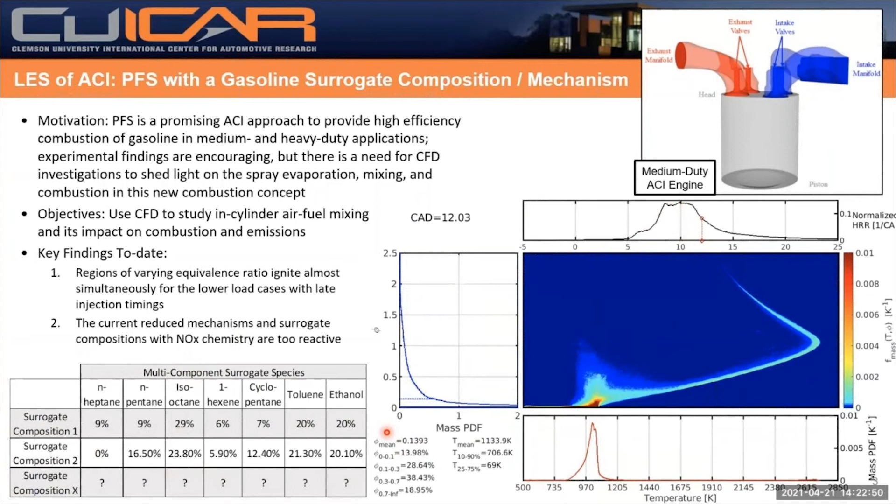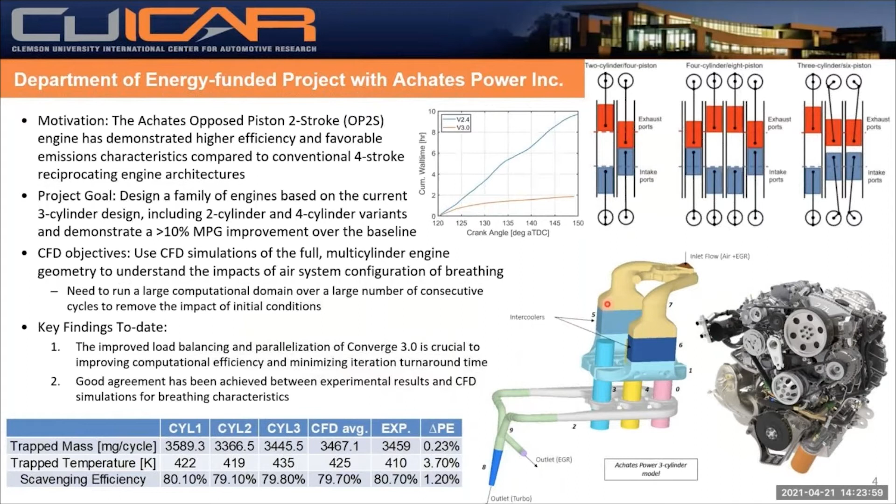Converge does have conjugate heat transfer, and conjugate heat transfer works great for a lot of applications. We have used it in the past. But we found that this iterative method is maybe better suited for thin thermal barrier coatings so that we can get better control over the grid within FEA and within CFD. And we can learn through that iterative process what are the impacts on FEA and CFD from the grid.

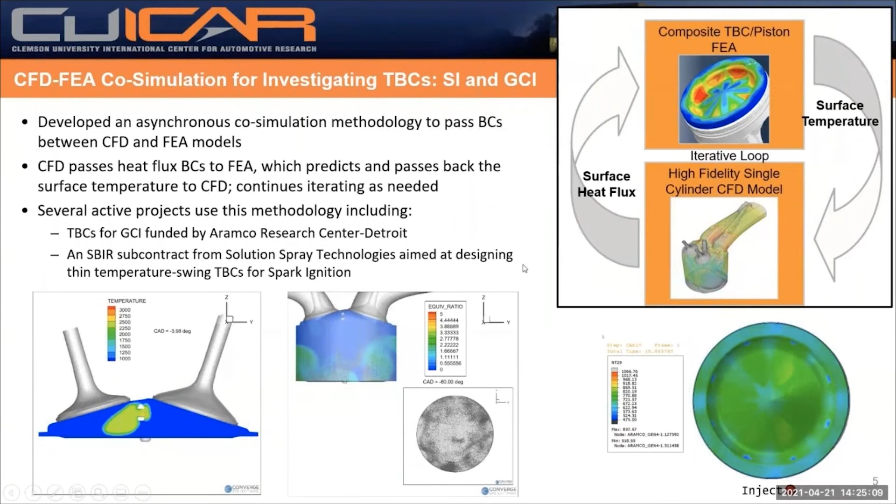So what we're showing down here is just an example result from that FEA simulation where we solve for the surface temperature on a piston due to combustion. And so finally, on this last slide, we have our new Army Center, Virtual Prototyping for Ground Systems, VIPR-GS.

This is being currently stood up, and it's funded by the Department of Defense, involving more than 60 faculty members at Clemson. There are three main focus areas: one is related to autonomy, and one is related to virtual prototyping.

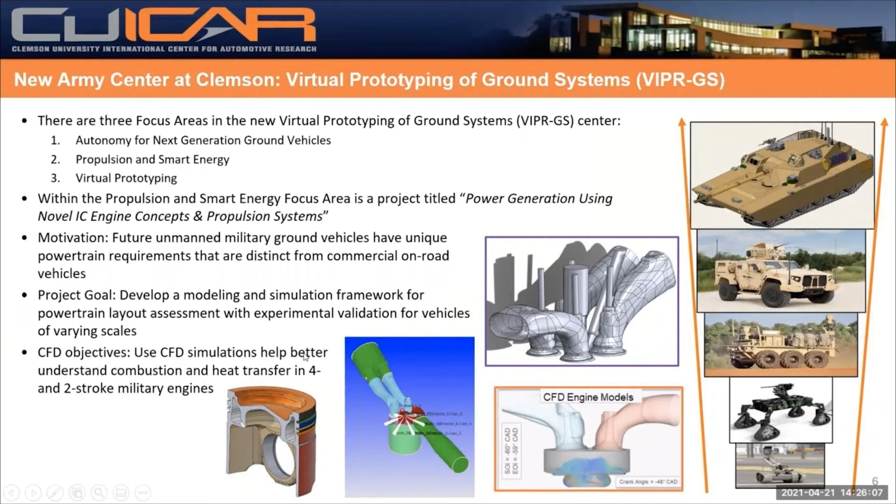With that, I'll thank you for your attention. I would like to acknowledge the funding for these projects, and I would also like to acknowledge our collaborators at Sandia National Labs, Dr. John Dec and Dr. Dario Lopez-Pintor. Finally, special thanks to the PhD students who provided most of the content, specifically Patrick O'Donnell, but also Sean, Ari, and Rahul. If you have any questions or would like to discuss more about any of these projects, please feel free to contact me at this email address. Thank you so much for your time and attention.

Next, we'll hear from Dr. Alejandro Roldan Alzate, who is a professor at the University of Wisconsin-Madison. Dr. Roldan Alzate received a PhD in mechanical engineering from the University of Wisconsin-Madison in 2008, then joined the Vascular Tissue Biomechanics Laboratory at the same institution as a research associate. In 2010, he joined the Department of Radiology at the University of Wisconsin-Madison as a cardiovascular modeling scientist, and in 2015, he obtained a joint faculty appointment in the Department of Mechanical Engineering and the Department of Radiology. His research focuses on fluid dynamics analysis of physiological and pathological flows using a combination of medical imaging, additive manufacturing, particle image velocimetry, and computational fluid dynamics.

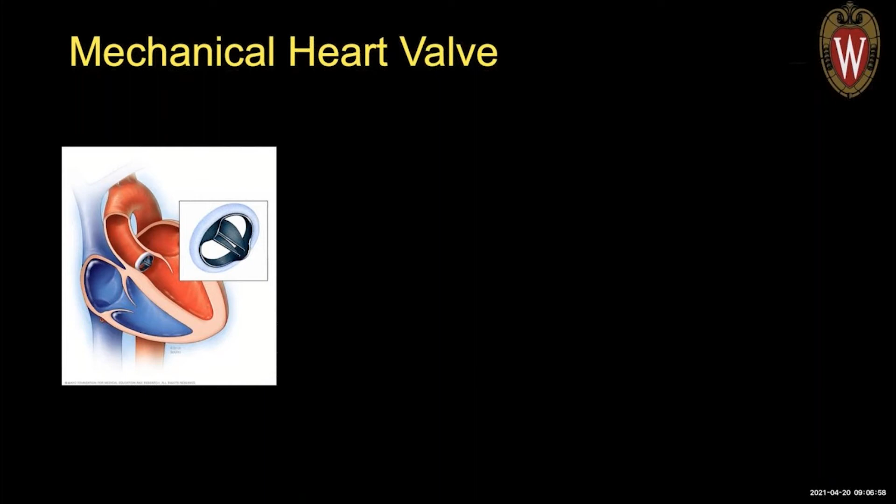We started by trying to understand how we could get Converge software to help us in the process of understanding physiological flows. One of the main applications for computational fluid dynamics in the market is mechanical heart valves. For that reason, we started with a simplified version of it, and we found how the adaptive mesh refinement methods developed by Converge are really well suited for what we want here, which is moving boundaries and complex flows.

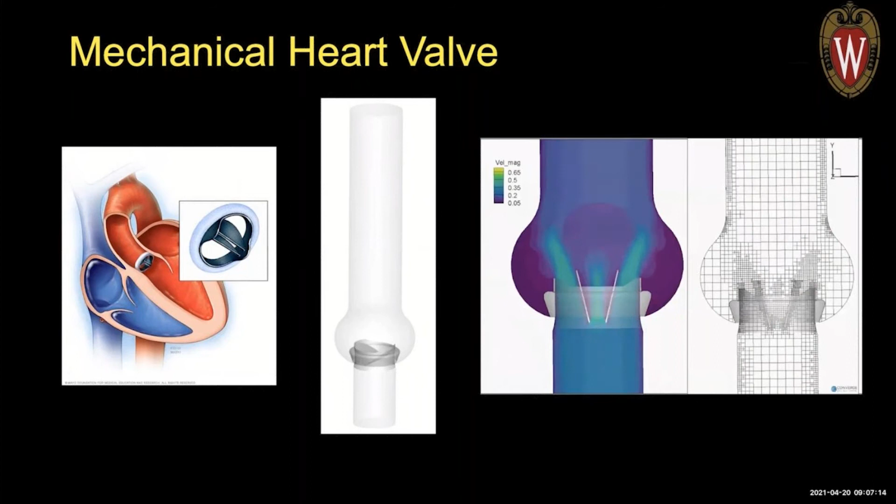One of the things we did was start analyzing how we could test the comparison of Converge software with other softwares, and we started trying to play with the settings of the adaptive mesh refinement. This was just a preliminary study. However, we found that if we wanted to keep going with this, we needed to standardize the way in which we simulate our problems.

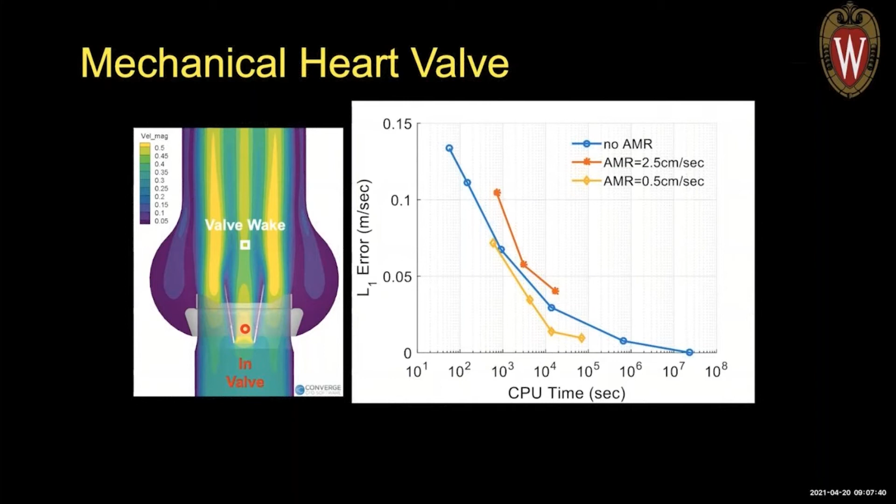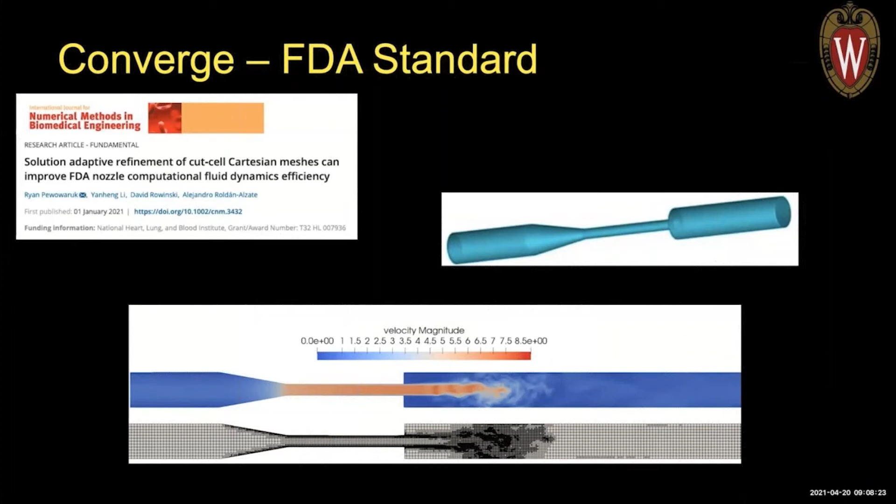This gave us some thoughts about, now that we have validated and standardized the way in which we do this, we can go into more patient-specific analysis. For that reason, we started looking at aortic coarctation, a disease that kids are born with, in which the aorta, a blood vessel coming out of the heart, is narrower than normal and imposes complex flows. MRI, for some reason, misses some of this information, so if we can use computational fluid dynamics to understand the flow in the aneurysm and other regions, then we are enhancing what MRI can provide us with for clinical purposes.

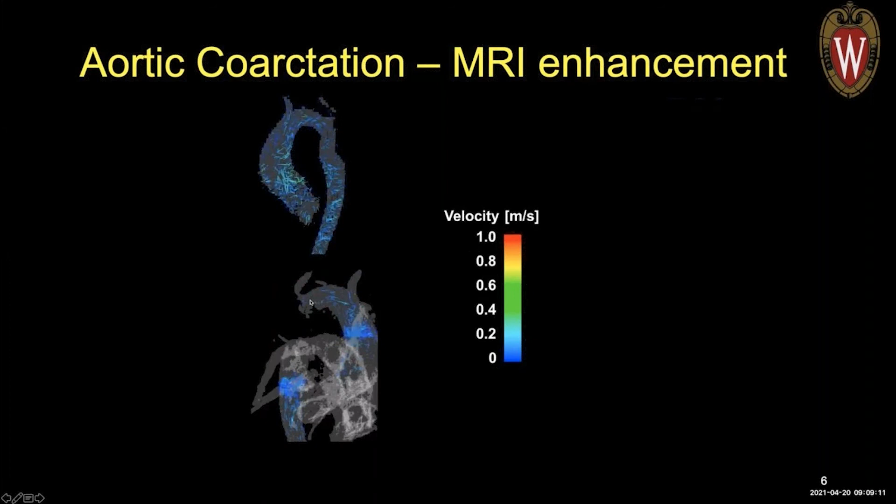The same thing happens in cases where there is a stent, for example. In this case, there is a stent in a region where you don't see signal in the MRI data. What we do is generate the geometry and get the data that was missing from the stent. To give a brief background, stents are made out of metal, and that metal imposes an artifact in the MRI signal that doesn't allow the velocity measurements to show up. So with computational fluid dynamics, we're able to fill the gaps between what is existing and what is not from MRI.

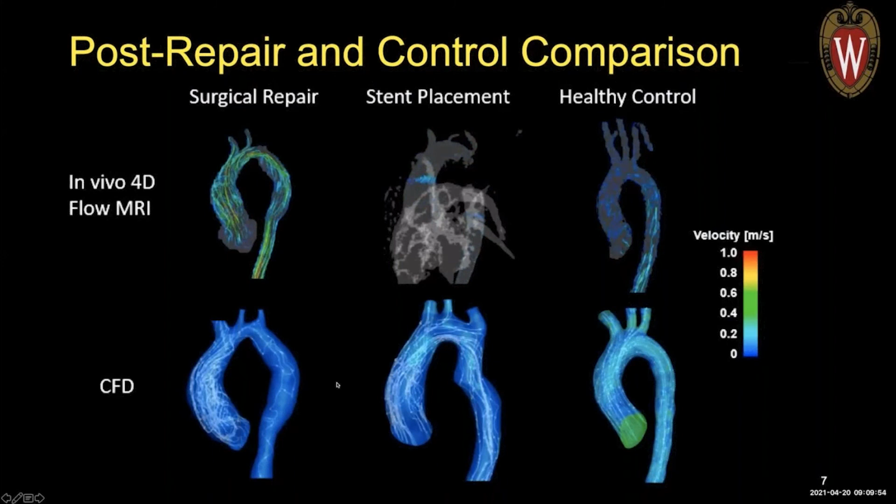Continuing with the same analysis, we tried to compare how 4D flow MRI, which is what we normally use clinically, can be enhanced with CFD, and then think about how in the future we could use this for clinical diagnosis and surgical planning. Connected to this, we started thinking how we can use computational modeling to clean and enhance the MRI data.

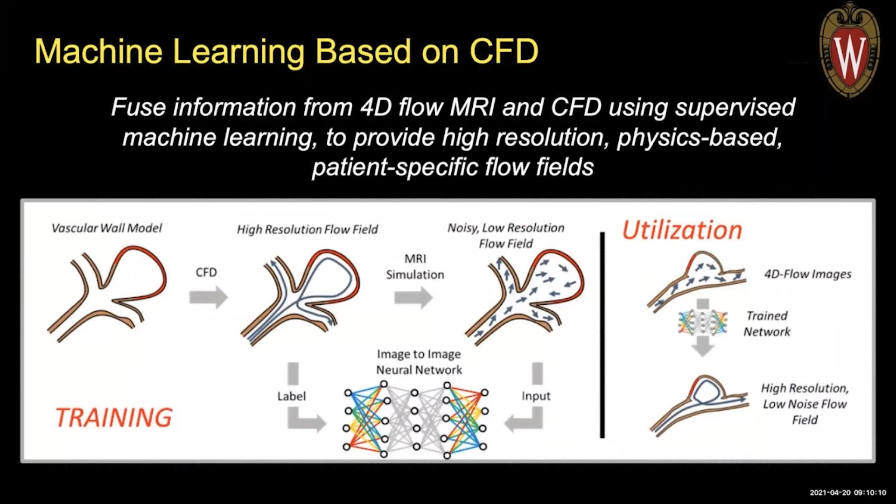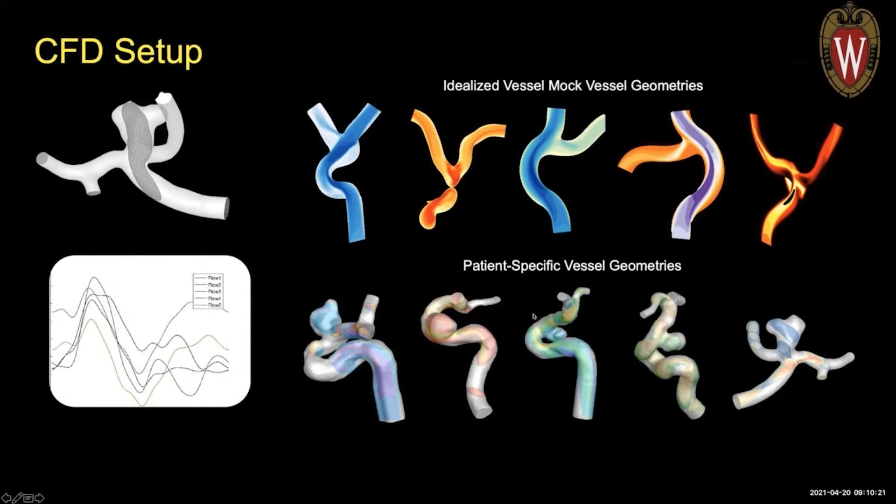For that reason, we mixed machine learning and computational fluid dynamics by generating a number of simulations with patient-specific flow curves and different anatomies of brain aneurysms to clean the MRI data. In that way, we convert the data to get something that is divergence-free, putting physics into the reconstruction of the MRI data, and not just getting crazy vectors that don't make sense, which is something that could happen with MRI.

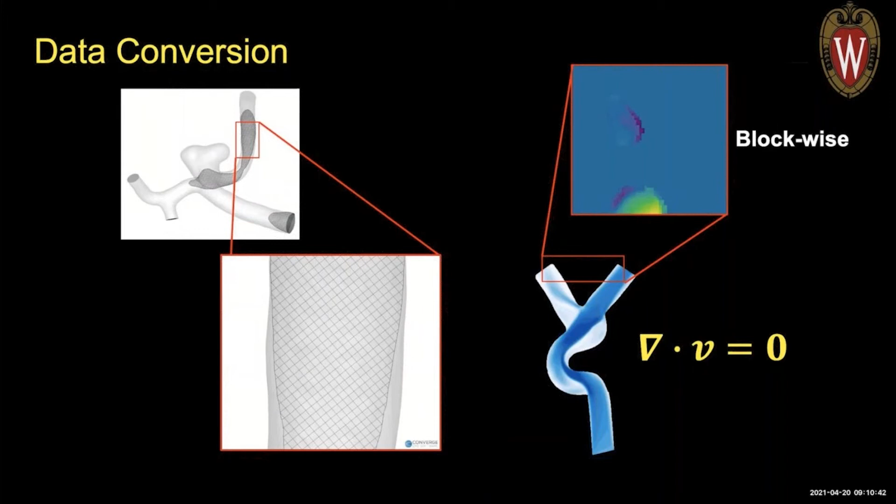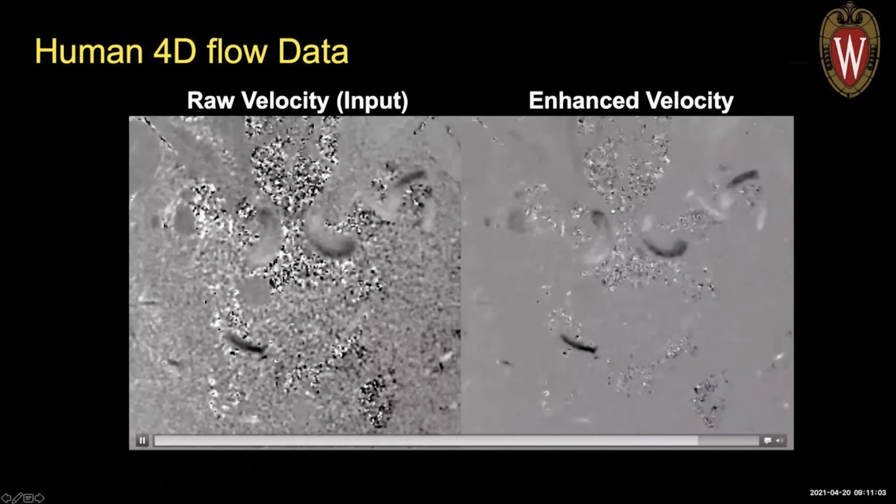So what we do is get a convolution neural network to train on the MRI data to make it look more physically realistic. As you can see here, the noise of the MRI data can be cleaned really well with the data from the trained network combined with the CFD simulations that we performed using the CONVERGE software.

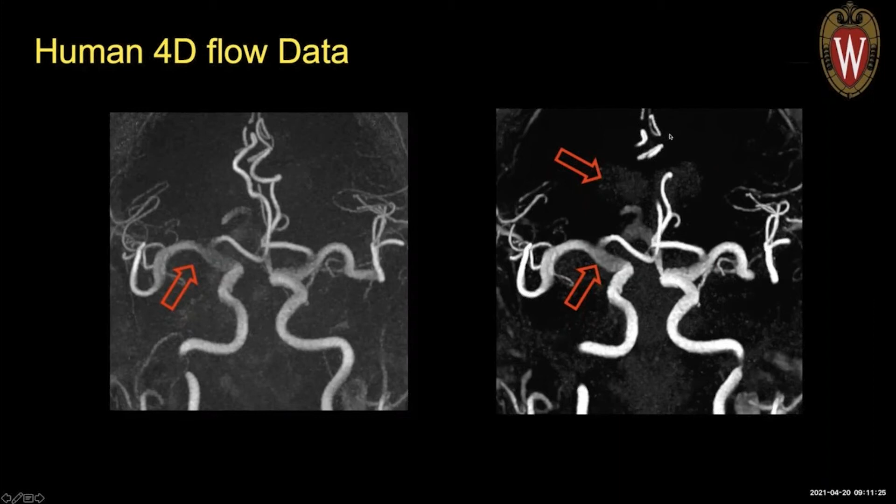This is an even clearer way of looking at it, because you see noise everywhere, meaning non-physical motion that the MRI is capturing, whereas the CFD allows us to clean it up and say those regions were not supposed to have flow, they were supposed to have zero velocities. This way, any derived parameter like wall shear stress, pressures, or velocities would be more realistic. For example, here is the normal 4D flow MRI data, and here is how it looks after cleaning with CFD. Velocities at the wall are more realistic, close to zero, allowing us to work with realistic physics.

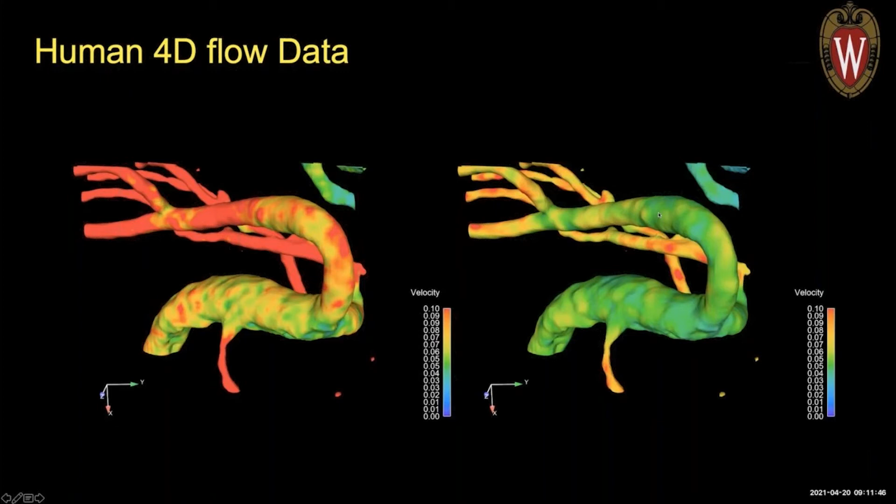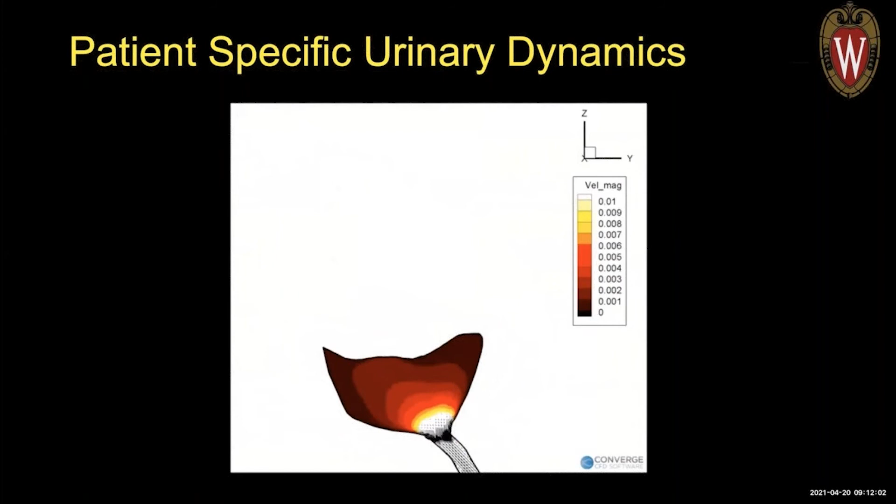Recently, we have implemented this method for urinary dynamics, used for patients with enlarged prostate or bladder problems. Since there's no non-invasive way of assessing this, we implemented realistic MRI data coupled with computational modeling, and we're able to analyze how vorticity in the bladder is affected by prostate enlargement and other problems.

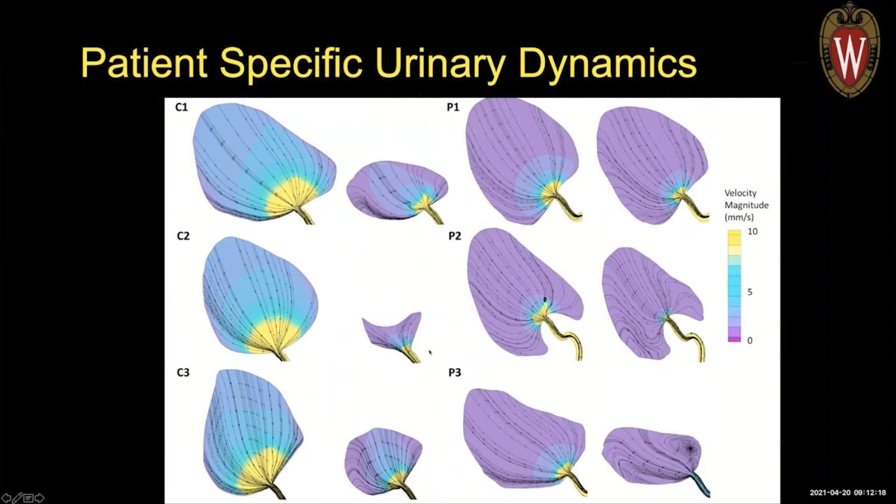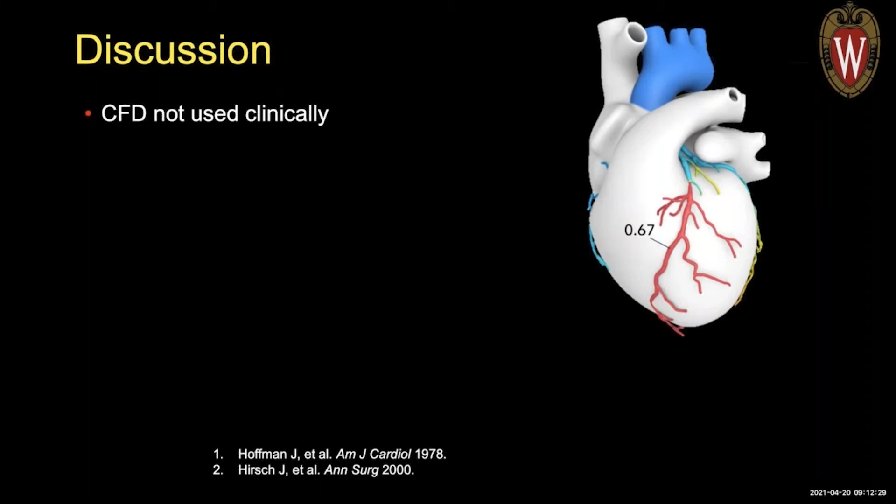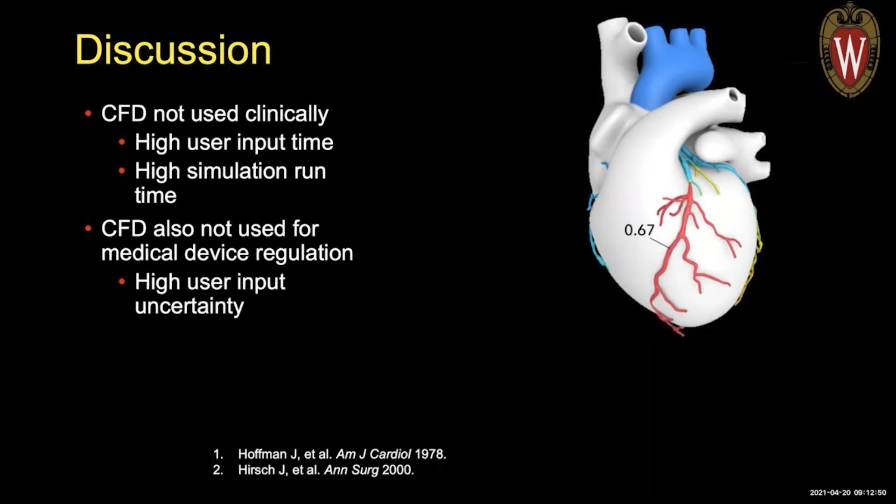With this, what we can say is computational fluid dynamics is not currently used clinically, except for a few companies that use medical imaging to detect coronary blood flow. It has high user input time and high simulation runtime. It is not used for medical device regulation under FDA standards, mainly because of uncertainty and other factors that could affect this.

But we think that solution adaptive refinement can minimize these factors and help us use computational fluid dynamics more actively in the clinic. With this, I'd like to thank you, and I'll welcome questions.

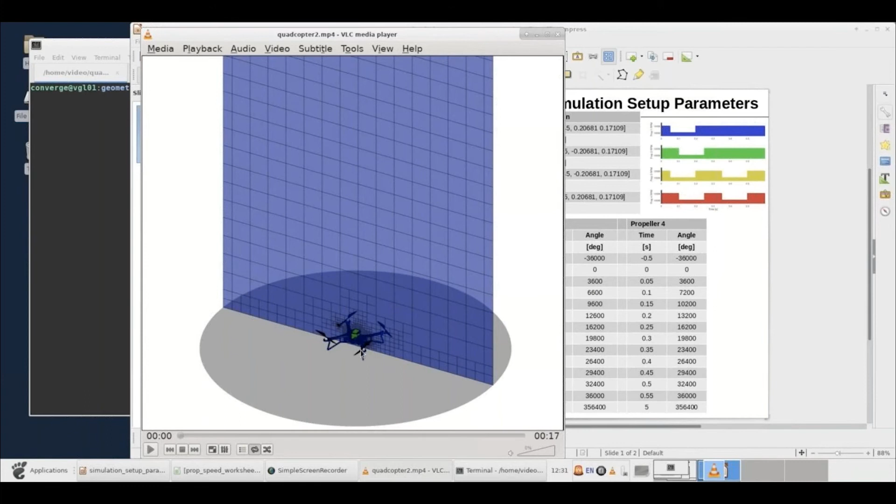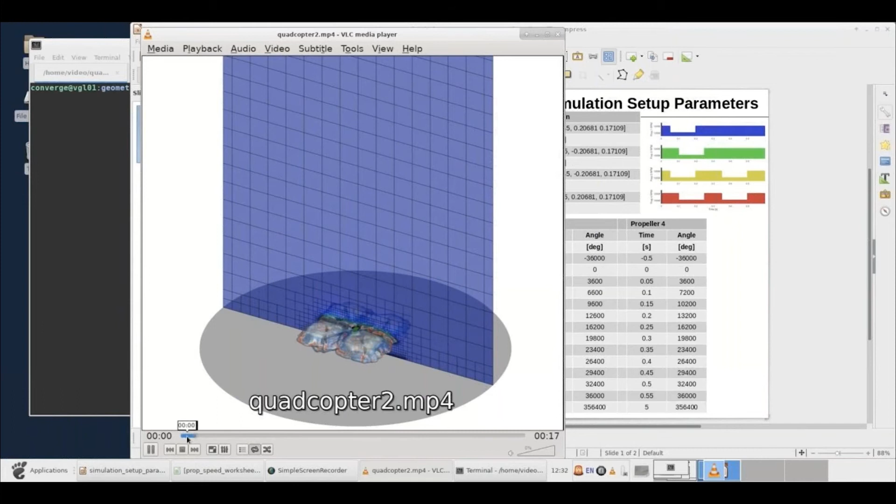We'll now be demonstrating Converge's ease of use by performing a complete case setup on an example case. The case we've chosen is a quadcopter fluid structure interaction problem, in which the speed of the 4 propellers is prescribed with profiles, and the motion of the copter is determined through fluid structure interaction. This case is selected to showcase how easy it is to include extremely complex motion and geometry of parts in a CFD simulation.

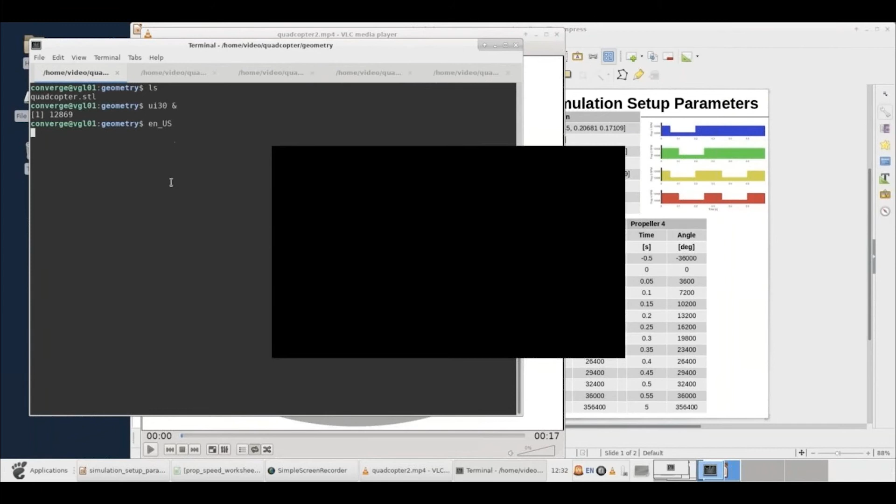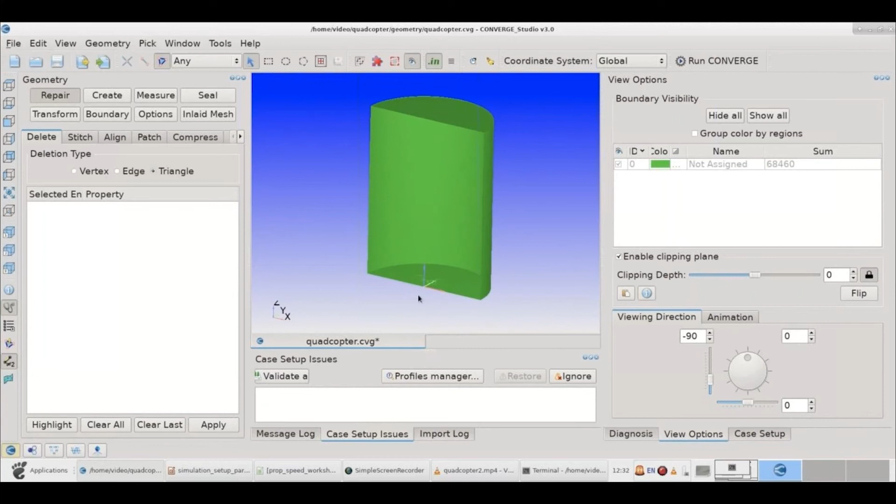We'll get started by launching Converge Studio and importing an STL formatted geometry. The STL file is read in, and we choose our STL format quadcopter geometry. Now we'll inspect the imported geometry. Let's draw a clip plane across the center so we can take a closer look, zoom in around the quadcopter, and see our outer domain. Then we'll change that clip plane so we can see the full drone.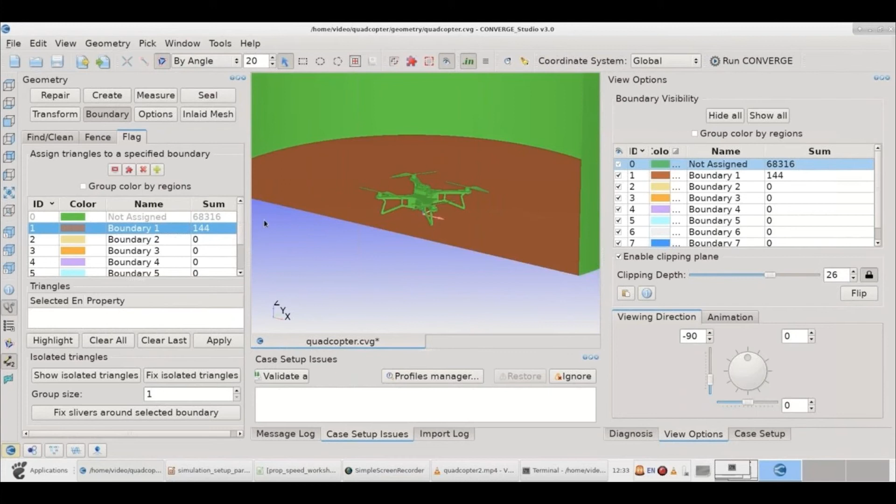After that, we'll begin the process of boundary flagging, where we group parts of our imported geometry into boundary conditions. We start by creating 7 boundaries, first flagging the ground and labeling it as the ground. Then we'll zoom out and select the far field boundary, renaming it as far field. We can hide those two boundaries now to focus on our quadcopter, being careful to keep the same orientation and numbering consistent with our case setup guide.

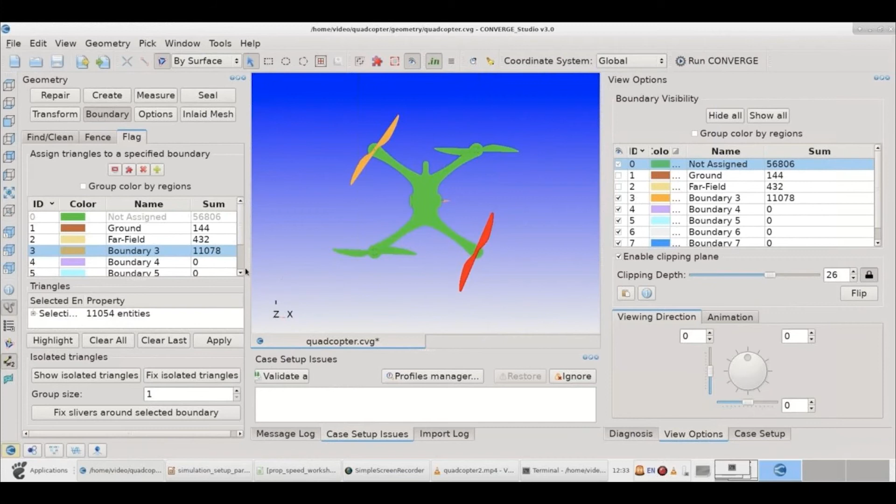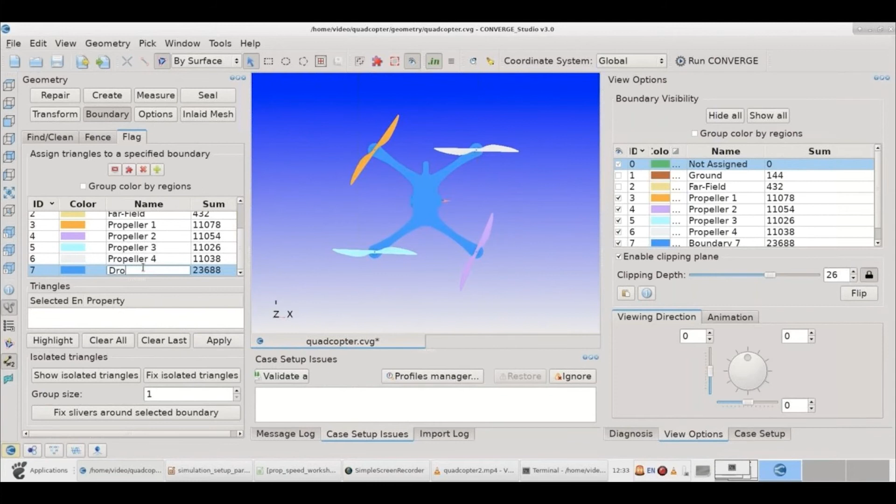Let's flag the 4 propellers by surface: propeller 1, 2, 3, and 4. Then give the boundaries the appropriate names. So we've got propeller 1, 2, 3, and 4, and our last boundary to select is our drone frame. We'll select that and give it an appropriate name. Now all our boundaries are assigned, and we can take a close look at our quadcopter with boundaries flagged.

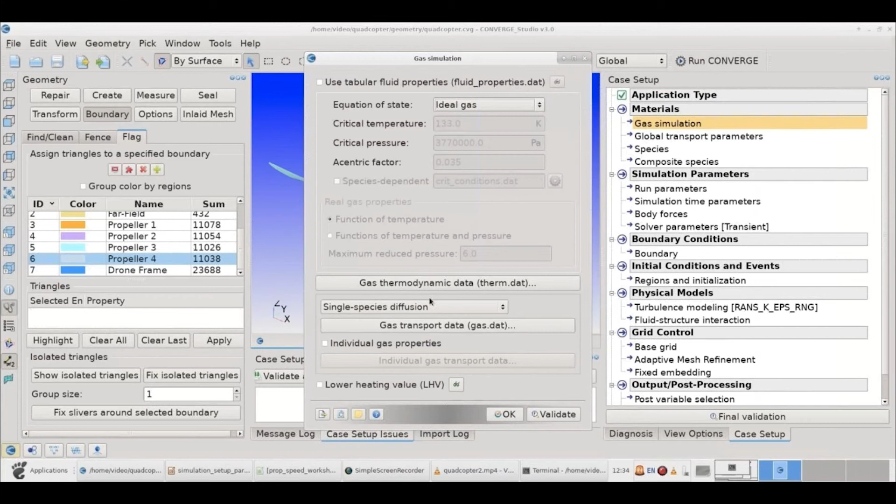Now we'll begin our case setup, and we'll choose our material type to be a gas phase. We'll add some body forces for gravity, and under our physical models, allow turbulence and fluid structure interaction, as well as adaptive mesh refinement and fixed embedding for our grid. Start with an ideal gas formulation for our gas properties and set our global transport properties to our defaults.

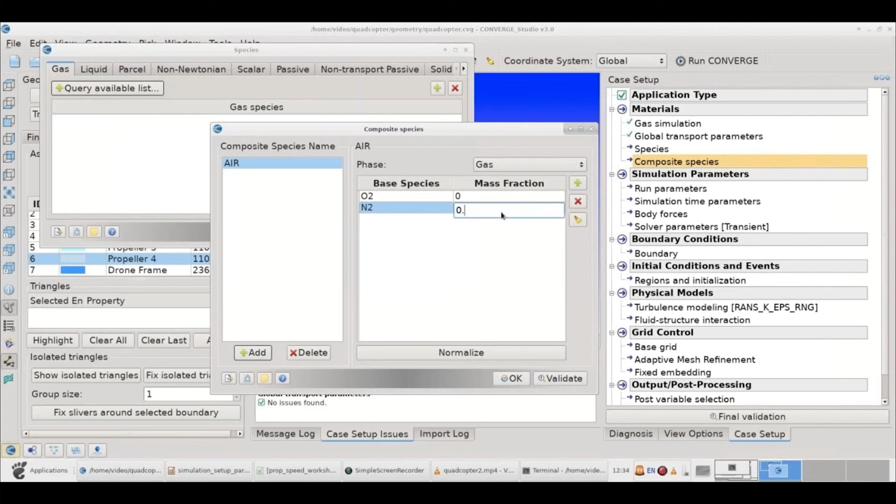Then we'll add under our species air, which is a mixture of gases. We'll create what we call a composite species, a mixture of fixed proportions of the species. So we'll add the oxygen, and then the nitrogen to our air, and set the mass fraction of each of those components. Now that we have this mixture defined, we can add it to our simulation under our available gases. For our run parameters, we'll mainly choose our defaults for transient compressible flow with energy and momentum solved for.

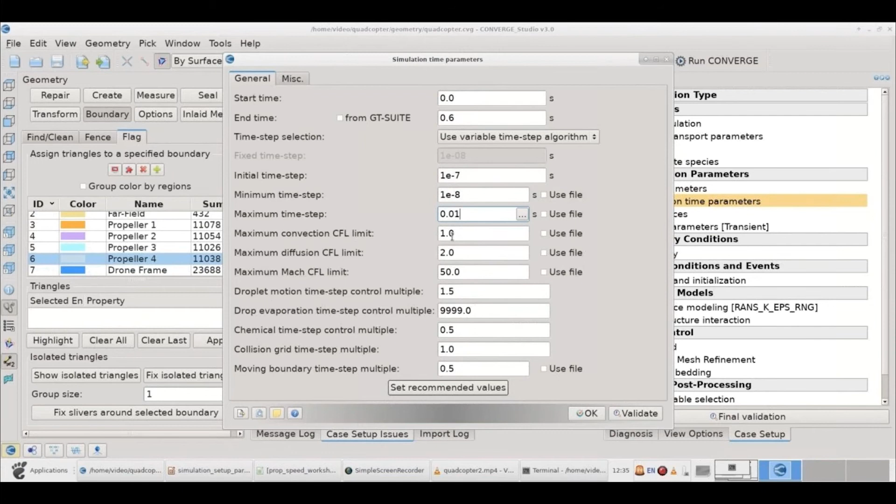Under our time parameters, we'll choose our start time and our end time. We'll use dynamic time stepping, so we'll have our CFL numbers to determine our time step, as well as some min and max limitations. After that, let's define our body forces. We have gravity, in this case, acting in the negative z direction. For our solver parameters, we'll leave everything at the default recommendations of CONVERGE Studio.

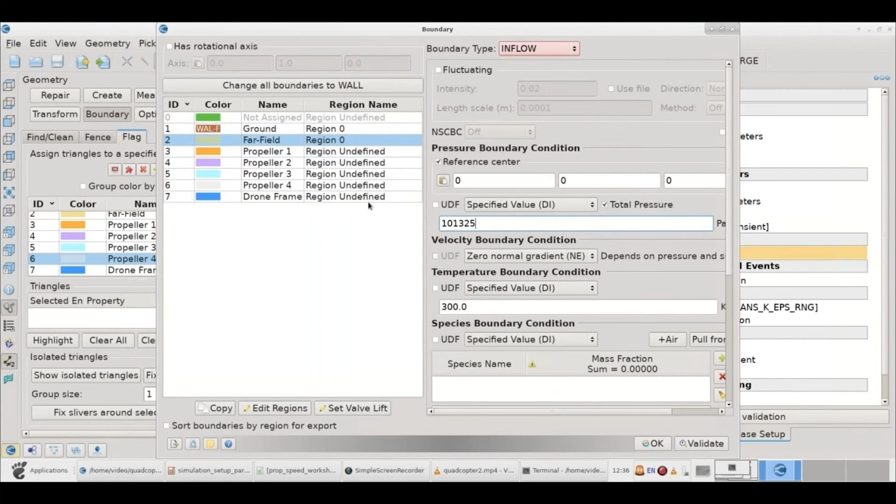Our next step is to define regions, and we'll set up our main region to be atmospheric air. After that, we'll define all of our boundary conditions. The ground will be a wall with our standard law of the wall type of boundary condition and fixed temperatures. Our far field will be an inflow set with a hydrostatic pressure, a reference point and a reference pressure. The incoming fluid, if there's any entrained, will be air.

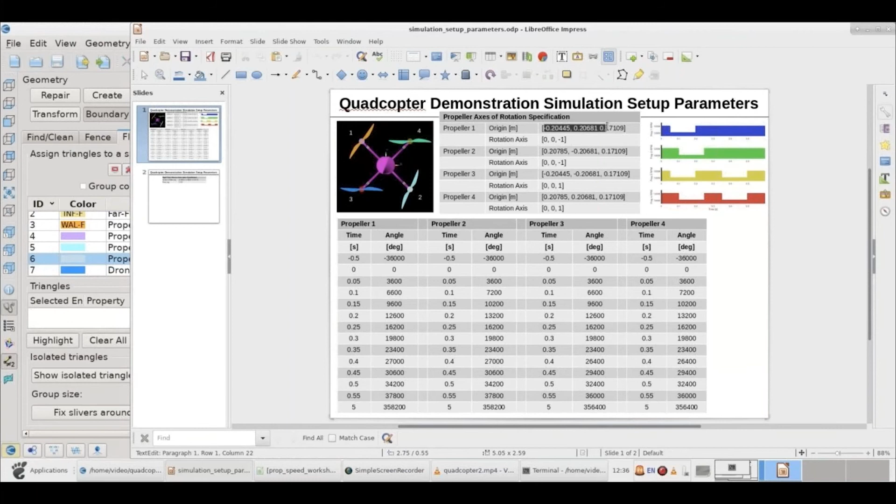After that, we'll go through and define the rotating conditions for our 4 propellers. We'll set those to be rotating, moving, so the geometry actually moves, and then we'll need to define the rotation axes. In this case, we'll pull our origin, which is our XYZ coordinates, from our case setup worksheet, and simply paste those values in. Our rotation axis for this first propeller will be about the negative z direction.

Once we've got this one defined, we'll copy this setup to the other 3 propellers, and then adjust their rotation centers. So let's go to propeller 2, copy that rotation origin from the worksheet, and paste it into the case setup, making sure the direction is appropriate. We'll do the same thing with propeller 3, copying that rotation origin and pasting it as the rotation center, and similarly with propeller 4. Now for propellers 3 and 4, we also have to change the direction since these rotate in opposite directions compared to propellers 1 and 2.

For the drone frame, before we go there, we also need to define our profile. We've set our velocity profiles so that we have a rotation rate that changes with time to allow the quadcopter to perform some maneuvers. So we'll paste a table with rotation angle versus time profile so that for each of these propellers, we can individually control the speed versus time.

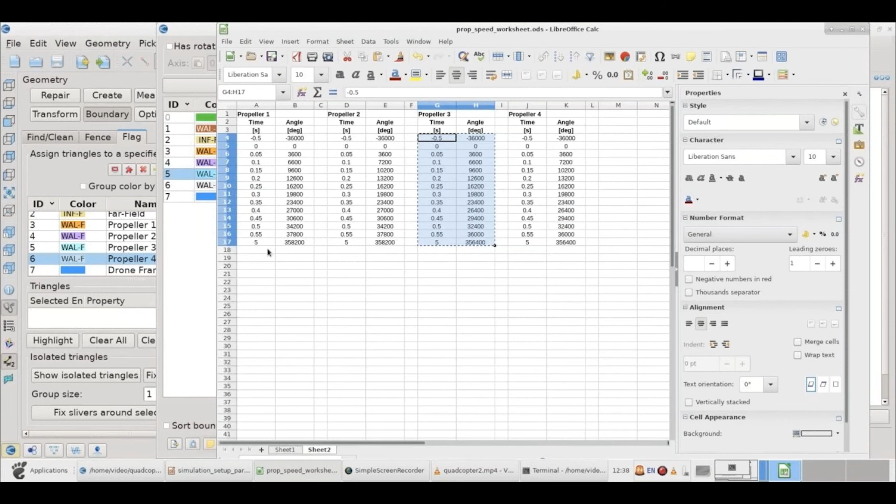We'll paste that for propeller 1, and then for propeller 2, we'll make a similar file containing profiles slightly different from propeller 1, to allow the maneuvers to be performed during the simulation. We'll paste those rows in, make sure it has a unique name, and then go on to propeller 3, where we'll choose a similar profile from that worksheet, copy it, and paste it in just like before, giving that profile its own name.

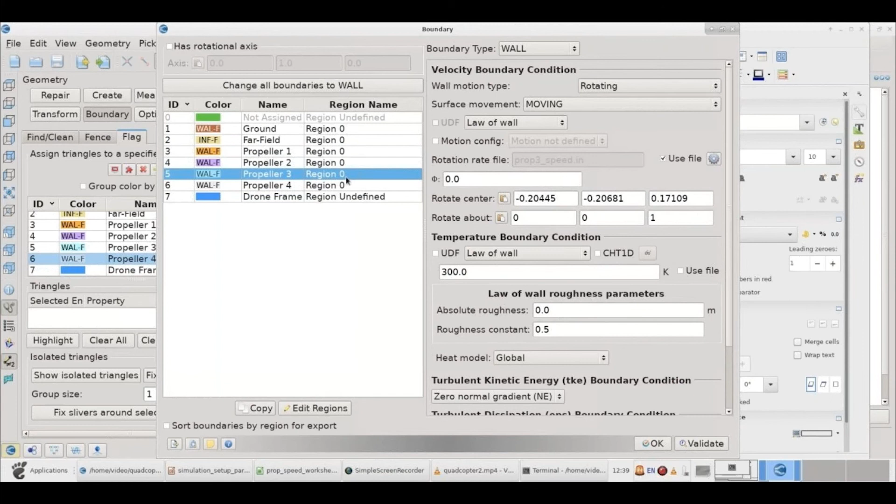After that, we'll go to our last propeller, adjust that name in a bit, copy those angles versus time, and paste those into our profile. Let's be sure to give that one a unique name—we'll call this prop 4 speed. Type that in, hit accept. Now propellers 1 through 4 should have a unique rotation center and a speed versus time profile to match our maneuver. For the drone frame, we'll assign that to the same region and set this one up to be part of the FSI object, which we'll define shortly.

Use our standard law of the wall boundary conditions, and this boundary will be all ready to go. So now we have all of our boundary conditions defined. We have an issue that we haven't defined our FSI object, but don't worry, we'll get to that soon.

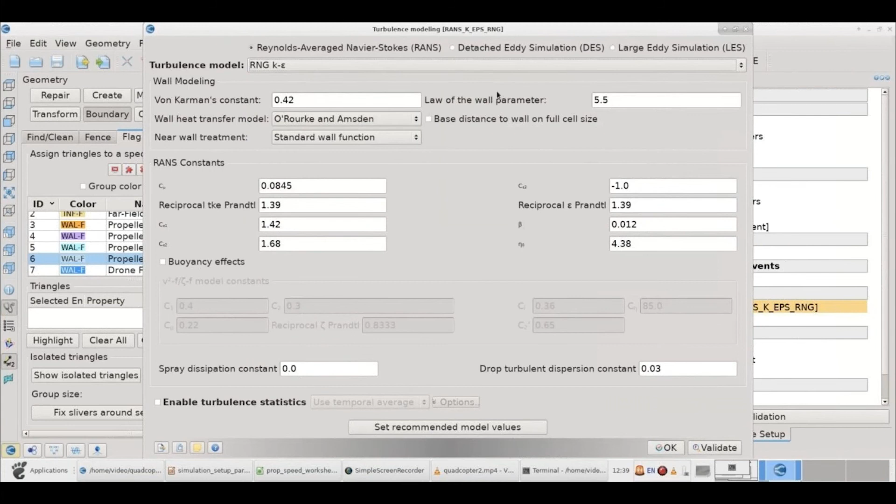Converge has a rich set of turbulence models available, including RANS, DES, and LES. In this case, we'll be choosing one of our standard RANS models.

For our fluid structure interaction setup, it's quite simple from the user's point of view. We'll simply add a rigid FSI object, which we'll call the drone, and then we'll add all of the boundaries which make up that FSI object. This is going to include the frame as well as the 4 propellers. Even though those propellers have individual motion profiles, they'll be moving together with our FSI object.

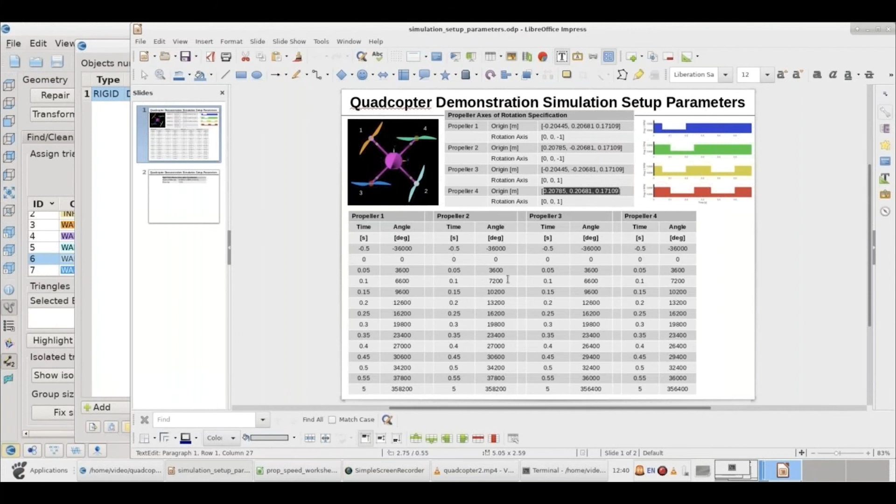Now we'll define the properties for our FSI object, including the center of mass, which in this case we'll define from our setup worksheet where this center of mass was pre-computed. We'll copy over that center of mass, and then for our mass, we'll use a constant mass of 0.2 kilograms. So we'll assign that.

For all the constraints, we'll leave those as our defaults. So our rigid FSI object is going to move in all 6 degrees of freedom. Now that our FSI object setup is complete, our boundary setup is ready to go. We'll move on to the grid.

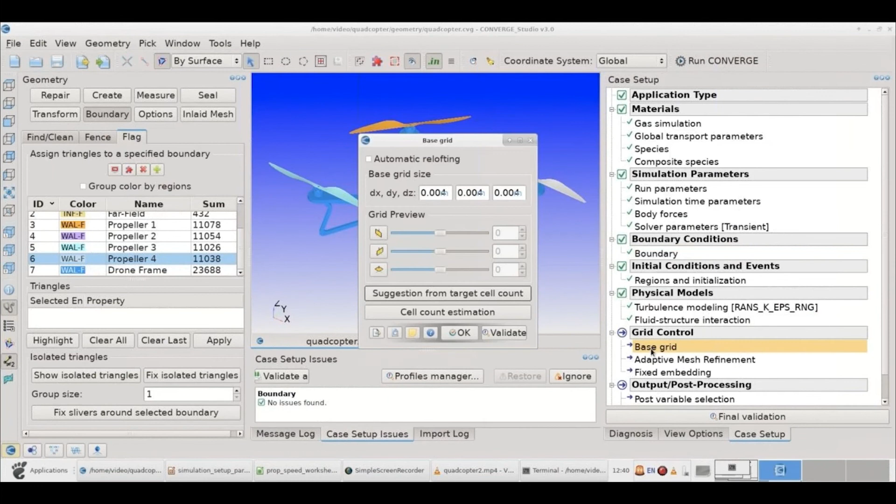With the grid, we'll first define our base grid, which is our biggest grid cells. In this case, we'll use a base mesh size of 0.004 meter, since this is a pretty small geometry. So we'll set that to be 0.004 for X, Y, and Z.

Then we'll move on to the AMR setup. For our AMR setup, we're going to define our maximum number of cells. In this case, we can use 1 or 2 million. We'll set that to be 2 million just for demonstration.

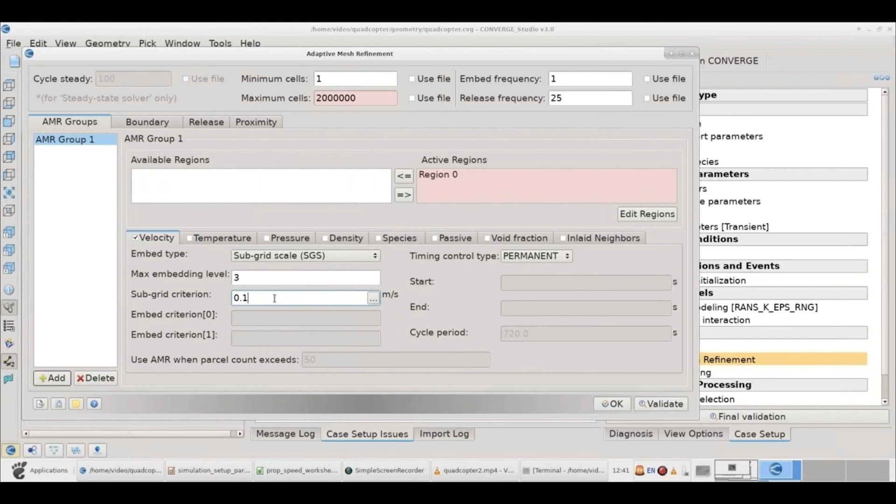Then we'll assign our region where the AMR will be active. We'll want to refine around the regions of high velocity gradient, so we'll set our SGS value for velocity.

Next, we'll move on to boundary embedding so we can have some finer grid around the propellers. We'll define a scale of 6 in this case, and 3 layers. Then we'll copy that to the other 3 propellers and assign propeller 2, propeller 3, and propeller 4 to have the same type of boundary embedding.

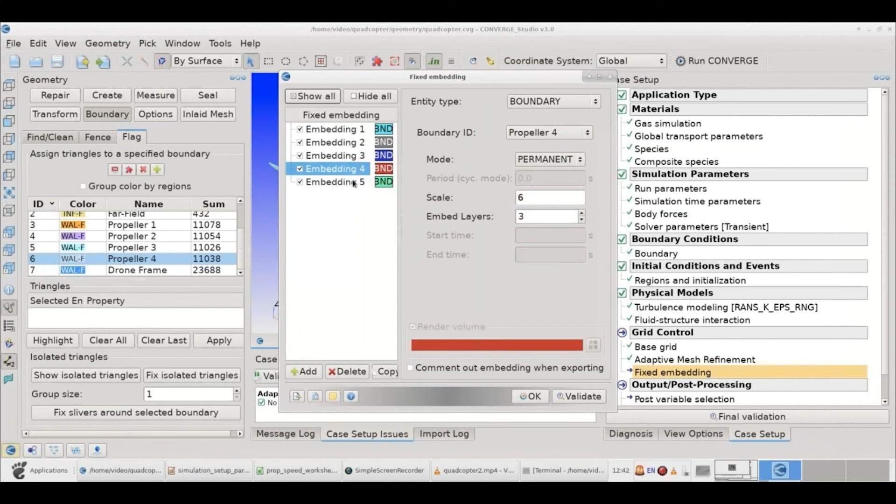Lastly, we'll add another embedding right on the drone frame of a little bit less scale than what we have on the propellers. So our grid setup is all complete, and that grid will be generated autonomously during the simulation.

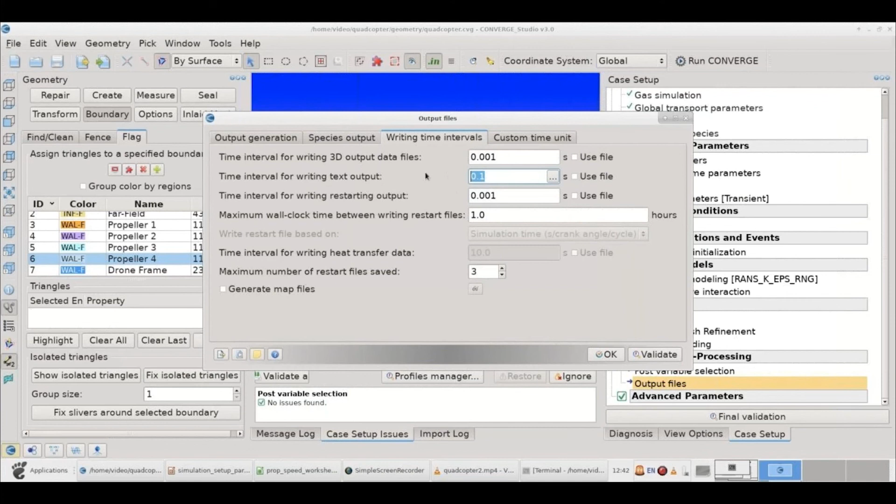Next, we'll choose our post variables, the variables we'll be able to look at as the simulation is running. We'll choose vorticity, Y+, as well as the Q criteria, as well as our standard outputs. Then we'll define a couple other output parameters, including the intervals at which our output files are written, including the 3D output, our text output, and our restarting output.

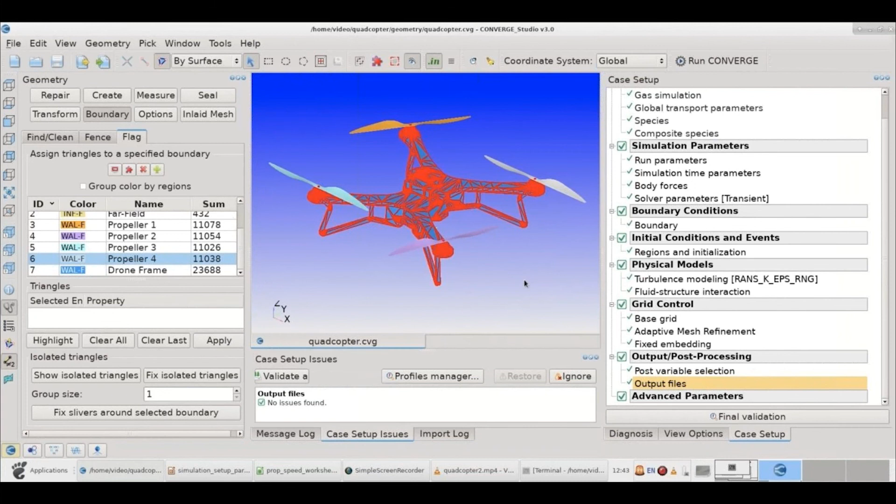Now our case setup is all complete. You can see those green check marks. We'll save our case, export onto our HPC environment folders, select our run directory, and export all of those input files there. We'll be ready to launch our job on our workstation.

After that, we can move to our run directory, begin the solver, and see our output that the input files have been read. The grid has been created at runtime. You can see those different levels. And now it's going to begin solving all of our equations.

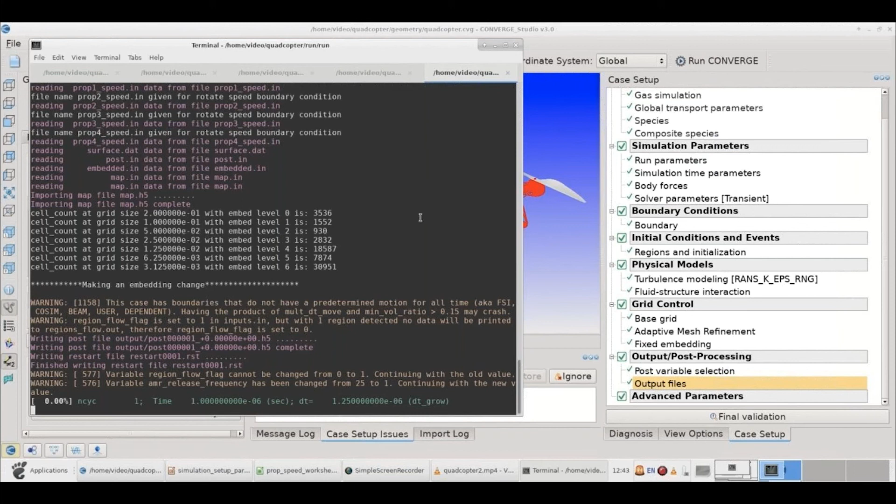You can take a look at the output to see the time step growing, and we'll let that simulation run as it progresses. As the simulation goes, we can move on to Converge's post-processing module.

First, the line plotting, where in this case, we'll jump to a directory that has been pre-run, a very similar case setup. So we'll skip over to that output directory where we'll be greeted with a list of the files created during the runtime. Let's first load up the cell count file.

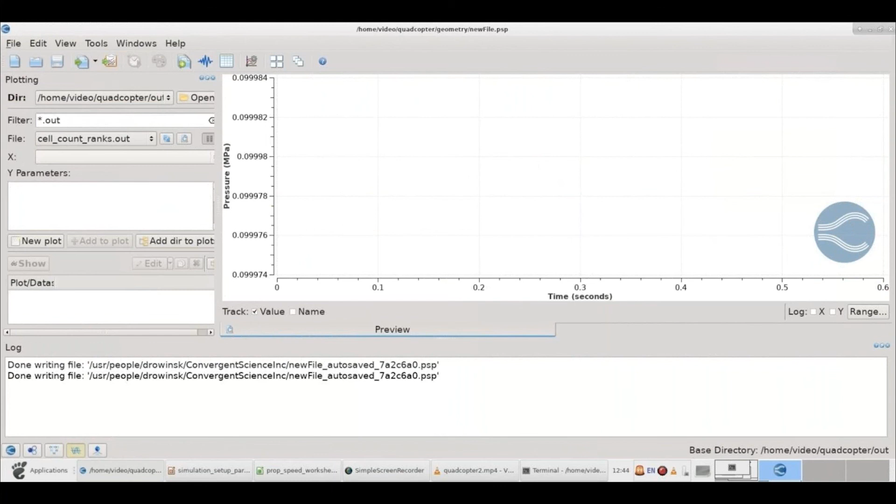We can see that cell count growing from about 100,000 cells to 1 million, which we capped for this run. Then we'll look at the drone motion.

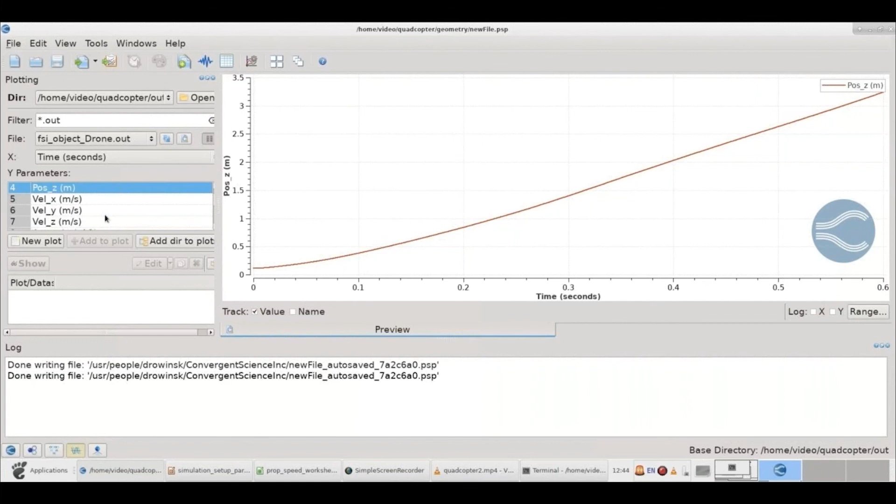You can see for the X, it started that maneuver at 0.4. So if we look at our motion profiles, that maneuver to move in the X direction started around 0.4. The Y maneuver began a little bit earlier, and we can see that taking off about 0.1 seconds. But the main component is our lift, going up to about 3 meters steadily throughout the simulation.

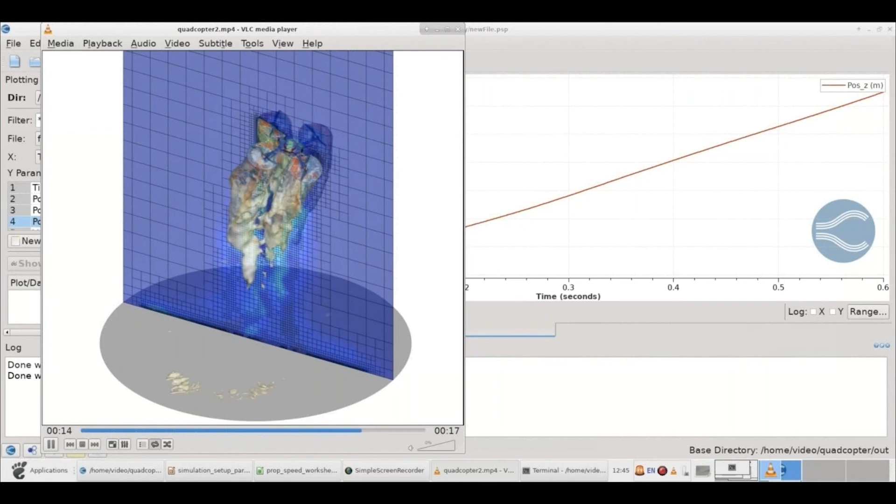Of all these line plotting things, we can also look at an output of the quadcopter's motion produced through TecPlot for Converge, where we can look at a cut plane showing the grid and how that's automatically refined following the motion of that drone, as well as an ISO surface on velocity.